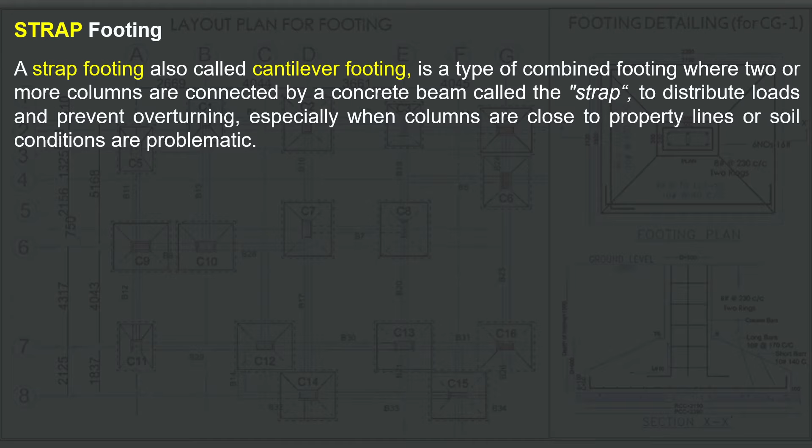So strap footing, also called the cantilever footing, is a type of combined footing where two or more columns are connected by a concrete beam called the strap, to distribute loads and prevent overturning, especially when columns are close to property lines or soil conditions are problematic.

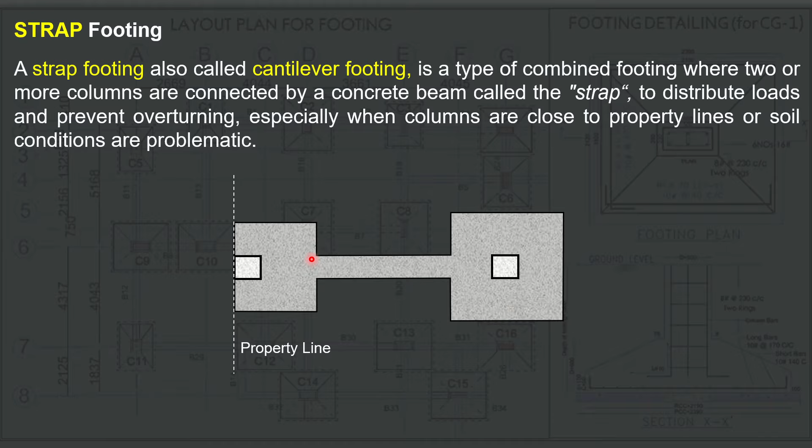So ito yung typical na setup natin para sa ating strap footing. Minention na rin dito na advantage ang paggamit ng strap footing kapag yung isang pundasyon natin ay adjacent sa property line. Kapag adjacent ito, kailangan mo siyang lagyan ng strap beam. By the way, this is what we call the strap beam. So by connecting these two foundations, magiging strap footing na yung setup natin dito sa ating mga pundasyon.

Another advantage ng ating strap footing ay kapag yung soil conditions natin ay problematic, para rin ma-prevent natin yung pag-overturn. So kailan ba nagkakaroon ng overturning? Kapag sobrang lakas ng pressure sa ilalim ng lupa natin na nagkakaroon ng uplift, then possible matumba yung ating pundasyon. So para ma-prevent yon, kailangan natin gawin itong combined footing.

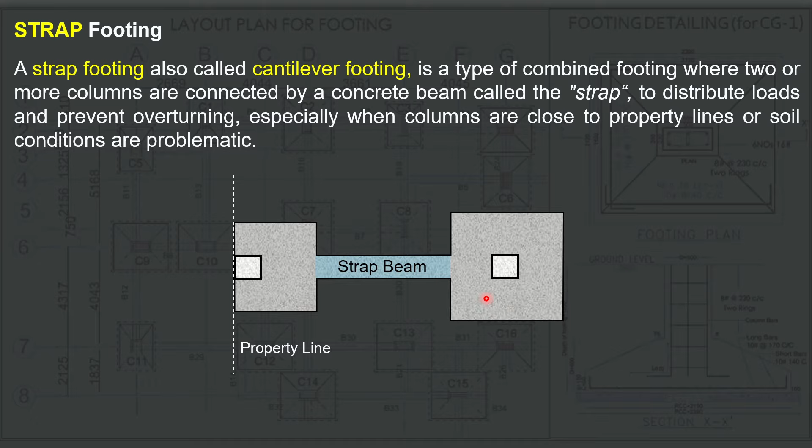Options natin yung rectangular combined footing, trapezoidal combined footing, o pwede rin naman itong simple lang na strap footing. Isa pang advantage ng strap footing ay makakatipid tayo sa volume ng concrete. Connect mo lang yung ating dalawang pundasyon para maging combined. Yun yung isa pang advantage ng strap footing natin.

Okay, next yung design considerations naman natin para sa ating strap footing. Say for example, ito yung ating plan view and elevation view ng strap footing natin. Number one consideration, the external footing is a concrete wall footing. So nasaan ba dito yung ating external footing between footing A and footing B? Yung ating external dito ay yung one touching the property line, labas na yan essentially. So ito yung ating external footing. Ang sabi dito, magbe-behave daw siyang parang concrete wall footing. Halimbawa, ito yung ating column, extend lang natin ito, magiging concrete wall footing na ito ang ating external footing.

Number 2 consideration, the contact pressure is uniform. Anong ibig sabihin nito? Yung pressure sa ilalim ng footing A ay dapat equal dun sa pressure na nangyayari sa ating footing B. Of course, this is combined footing, so essentially kung ano man yung nangyayari sa A, yun din dapat yung nangyayari sa B, dahil as one naman talaga sila dito.

Last consideration, the interior footing is isolated with a large column, commonly designed as a square footing. Madalas ang shape ng ating mga interior footing ay square footing. Yung footing A dito, pwede itong maging rectangular essentially. Tapos sabi rin dito, yung interior footing natin madalas meron siyang large column compared dito sa footing A. Kasi itong interior, sila yung may pinakamalalaking loads na binubuhat sa mga buildings. Kaya dapat sila talaga yung may pinakamalaking size ng column and also pinakamalaking size na pundasyon. Yun yung criteria natin para dito.

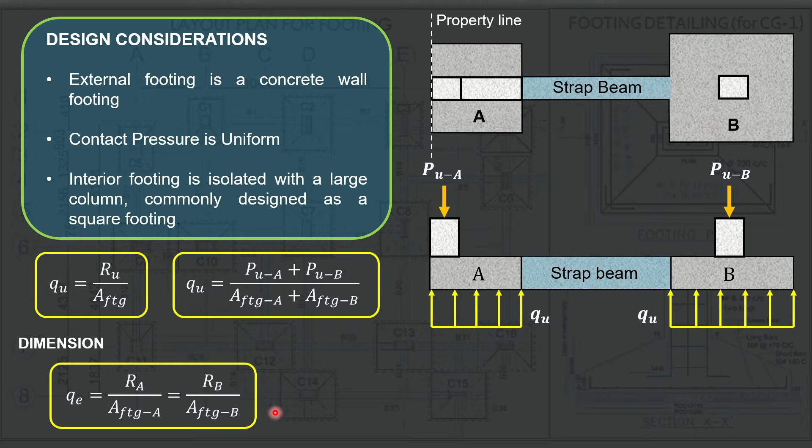Okay, and then for the dimension, ito pa rin naman yung formulas din natin. The QE is equal to RA over area of footing A, or this is equal to RB divided by area of footing B. Of course, yung mga R dito, ito na yung magiging service loads din natin dapat, kasi for dimensions, service loads dapat yung mga loads natin dito. Now, ito naman yung magiging RAU natin at saka ang RBU, hiwalay na to bale. Take note that now we have two resultants or reactions dito sa ating strap footing.

So, RAU, ibig sabihin ultimate ito, no? So, ide-derive natin ito dito. Babalikan lang natin ito. Separately natin silang gagawin, no?

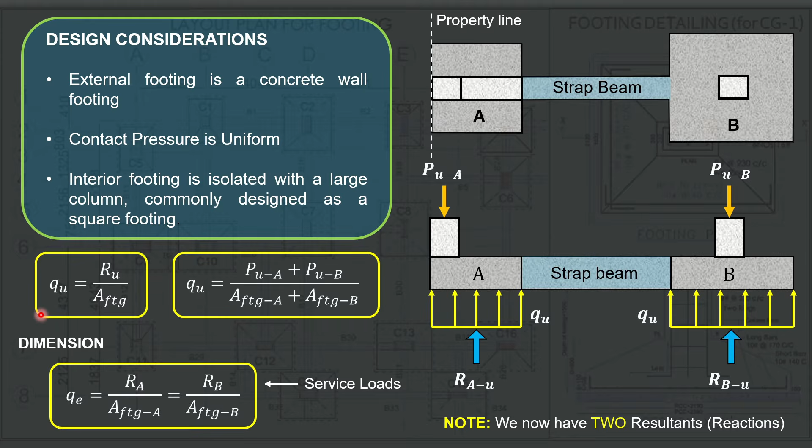So, pag solve natin yung QU nung as one, ito yung gagamitin natin na formula. And then, for solving RA and then RB, babalik tayo sa formulang ito. So, hiwalay natin sila mamaya.

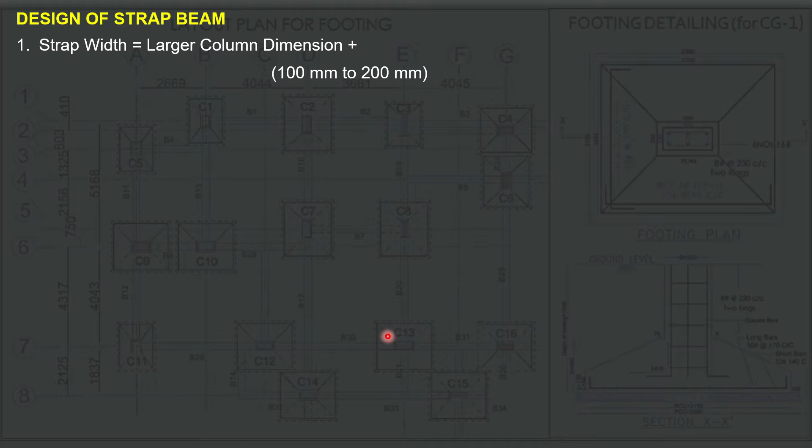Okay? So, ito naman yung sa design ng strap beam natin. So, for the strap beam, number 1, yung strap width natin is nasosolve natin by considering the larger column dimension, tapos nagdadagdag tayo ng 100 to 200 mm na additional.

Okay? Number 2, the design moment and shear is calculated from the edge of the footing pad. Ang ibig sabihin nun, kung ito yung ating strap footing, ito yung edge na sinasabi niya, no? So, yung edge ng ating strap beam. So, dito merong lalabas na VU and MU for both edges.

Take note na yung VU natin dito sa left footing ay dapat or always equal sa VU dito sa right footing. Pero yung MU is not always equal. So kung magde-design tayo ng bakal or main bar nitong ating strap beam, kunin na lang natin kung sino yung pinakamalaking MU between left and the right.

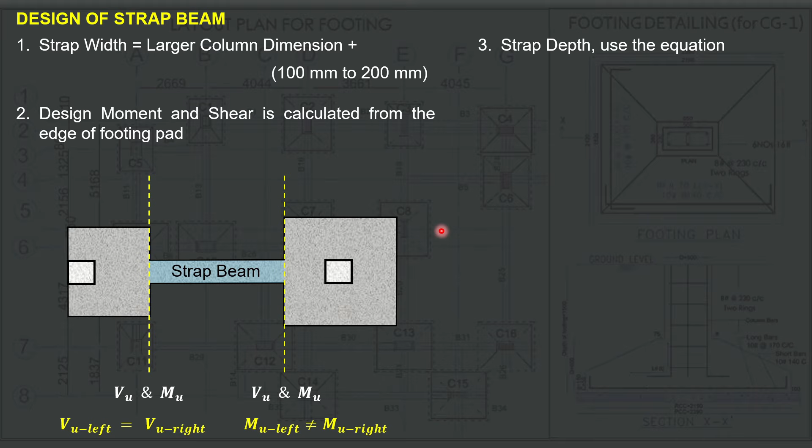Step 3, the strap depth. Use the equation VU must be less than or equal to the phi VN, where the phi VN here is simply equal to 0.75 yung phi natin, then yung VN natin, okay, yung nominal shear natin is simply 1/6 lambda square root F prime C BD. Then for the shear reinforcement, dito na siya papasok.

So kunin lang natin dito yung magiging spacing natin muna. So ang sinosolve kasi natin dito sa step na to is the D. Okay, so pagka-solve natin nung D, kunin natin siya dito. D over 2, then compare dun sa 600 mm. So kung sino man yung pinakamaliit doon, so yun yung i-adapt natin na spacing.

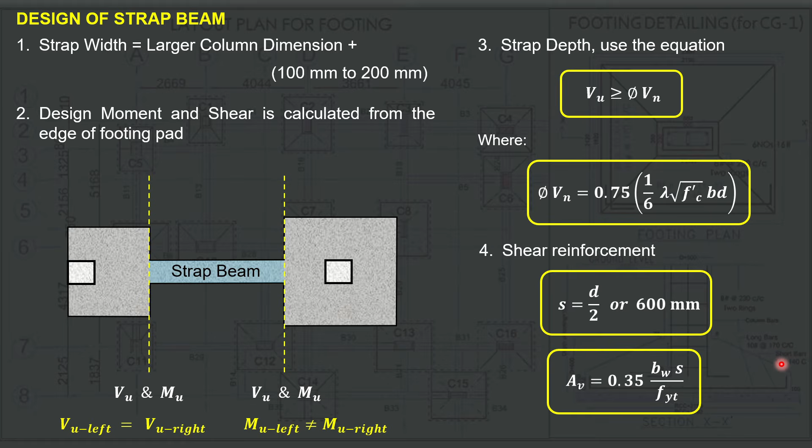Then yung spacing na makukuha natin dito is gagamitin natin sa formula ng minimum. AV is equal to 0.35 BW. This is the width of the strap beam. Yung S, yung nakuha natin dito sa step number 4. Then divide this by the FYT nung ating shear reinforcement for the strap beam. And then dito, meron ka na ditong area ng shear para dito sa ating strap beam. Okay, AV is equal to 0.35 BWS over FYT.

Alright, example number 3, strap footing. Two 0.4 by 0.4 meter columns 6 meters apart are transmitting loads on two separate footings connected together with the strap beam. The left column carries 300 kN of dead load and 250 kN of live load, while the right column carries 500 kN dead and 400 kN live. The allowable net soil pressure is 120 kPa. The reactions for both footings are spaced 5 meters apart.

Assume weightless strap beam. Use one effective depth for all calculations. F prime C is 21 megapascal and Fy is equal to 276 megapascal. The bar diameter is also 25 mm.

Okay, so meron tayo dito ang strap footing. Okay, so yung column distances natin dito, center to center is 6 meters as mentioned na rin dito sa ating problem. Okay, and then meron pa ditong isang distance na minention, yung 5 meters apart, yung reactions daw. Okay, so yung reactions natin dito, so RA and then the RB. So tawagin natin tong footing A and then footing B na lang itong interior natin. So RA and then RB.

So they are 5 meters apart. So again, no, yung center to center nung ating column, that is 6 meters. Then yung center to center nung ating reaction is 5 meters. So again, no, recall natin na yung mga reactions or resultants natin, they are always acting at the center of the footing. So yung kung ito yung footing A natin, yung RA natin nag-a-act sa center ng ating footing A, then yung RB naman nag-a-act dun sa center ng ating footing B.

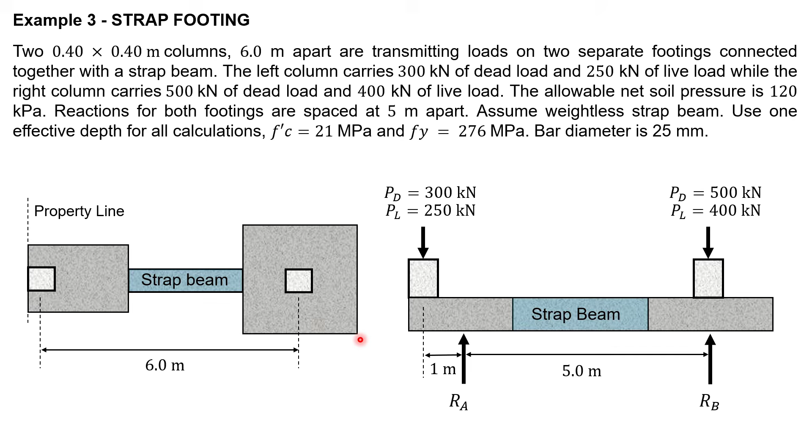Dito naman sa right column, we have 500 for the dead and then 400 for the live. So kahit hindi sabihin yung left or right column dito, dapat alam natin na ang interior natin ang dapat magbubuhat nung pinaka malalaking loads. Ano man yung summation neto, for example, this one is 550 and then this one is 900, yung 900 dapat dun natin i-load sa interior column lagi. Okay, so yun yung ating isang assumption dito.

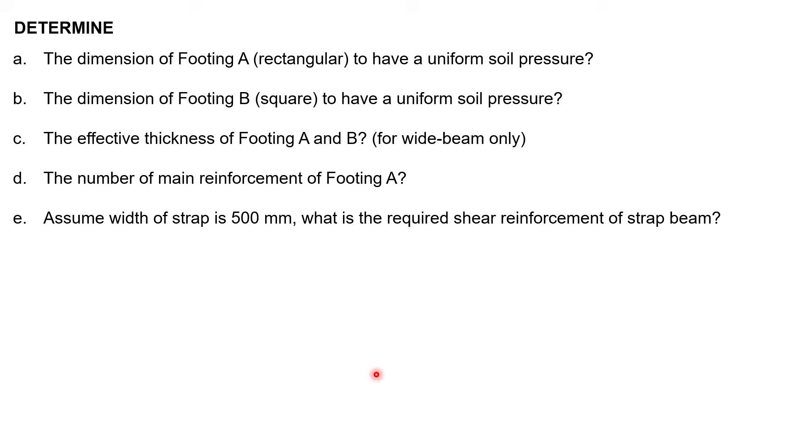Now ito yung mga tanong. Determine the dimension of the footing A, which is a rectangular daw, to have a uniform soil pressure. Dimension of the footing B, the square, to have a uniform soil pressure. Letter C, the effective thickness of footing A and B for wide beam only. Okay, and then D, the number of main reinforcement for footing A. And then E, assume width equal to 500 mm, what is the required shear reinforcement of the strap beam?

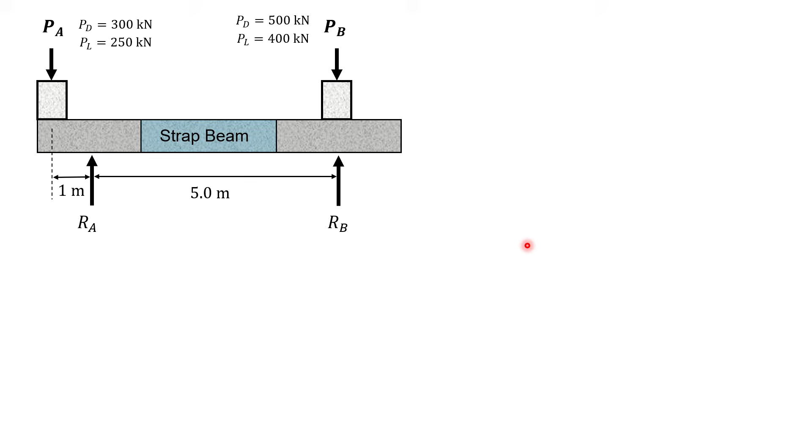Okay, so ito yung ating strap footing elevation. Okay, so nandito na yung mga dead and live natin and everything. So unahin na natin dito i-calculate muna yung mga service loads natin.

Okay, so for PA, this is simply dead plus live. So 300 plus 250 is 550. Then for PB naman, that is dead plus live din, 500 plus 400, that is 900 kilonewton.

Okay, then solve na rin natin dito yung factored loads. So for PA ultimate, that is 1.2 dead plus 1.6 live, or 1.2 ng 300 plus 1.6 ng 250 is 760 kilonewton. Then for PBU naman, that is 1.2 ng 500 plus 1.6 ng 400, then we have 1,240 kilonewton.

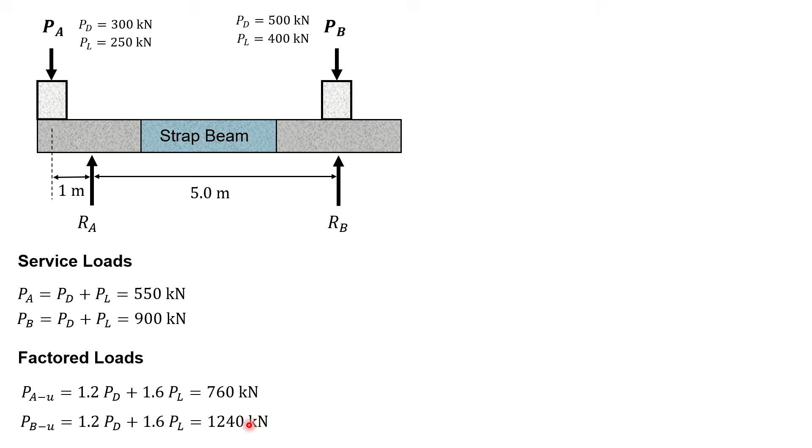Okay, so ito yung isa sa mga unang steps natin dapat, no? Separate na natin yung service and then the factored loads para diretso inputs na lang tayo.

Okay, so for A, tanong dito is yung dimension daw nung ating footing A. Okay, so for example, this one is the footing A natin. Okay, then nandito yung ating PA dito, which is equal to 550 kilonewton. Okay, so magkakaroon dito ng reaction A daw na nag-a-act dito sa center ng ating pundasyon.

Okay, so for example, this is the length of the ating foundation A. Recall natin, resultant acts at the centroid of the foundation. So kung X distance yung nandito, dapat X distance din yung nasa right. So paano natin kunin dito yung length ng ating pundasyon?

So actually, recall natin na yung kanina dito, yung centroid nung column A papunta dun sa reaction, meron pa tayong sobra na 1 meter. So ito yan kanina, no? Tapos ang ating distance na to, okay, so it is actually at the center of our column.

Now yung column natin dito sa column A, o actually both of the columns natin ay 0.4 by 0.4. So yung half nung 0.4 natin, that is actually 0.2. So dito pa lang pwede na natin kunin actually yung X natin dito. So yung X is simply 0.2 plus 1, so we have 1.2 meters.

Then we can actually see, no, that L is simply 2X. So yung L natin dito ay na-solve na natin kaagad, no, just by looking, 2.4 meters. Okay, and then take note, no, para makumpleto natin yung dimension ng ating rectangular footing A, the net pressure here is 120 kilopascal as mentioned dun sa problem natin. Then ito lang yung gagamitin natin.

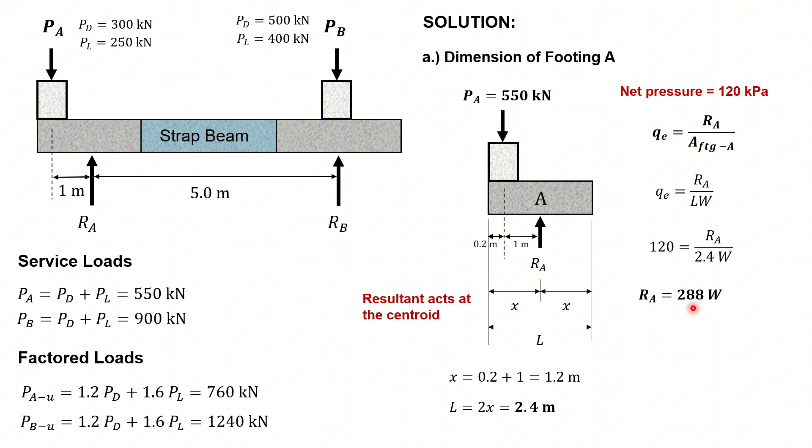Q effective is simply equal to the RA, the reaction A, divided by the area of the footing. Then pwede natin itong simplify, yung area ng footing is simply length times the width. Okay, then yung QE natin, yun pa rin naman. So substitute natin dito, QE is 120 kilopascal is equal to RA, di natin alam, divided by 2.4 yung length times yung width na hindi rin natin alam pa. Okay, so pwede nating sabihin that RA is equal to 120 times 2.4, that is 288 times yung W. Then, say for example, tawagin natin tong equation number 1.

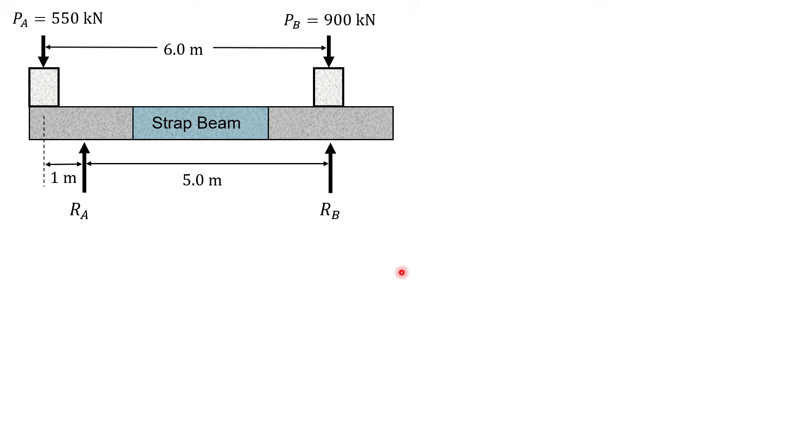Okay, so again, no, yung distance daw ng ating column to column ay 6 meters. Okay, so nandito yung PA natin 550, then yung PB natin na 900. So service lang muna yung tinitignan natin dito kasi dimension yung kailangan natin. Okay, so para makuha natin, no, yung magiging value ng RA, para makuha natin yung W, simply we take moment from the center of the column B. So papasok yung PB, so 0 na yan, wala siyang moment arm.

Then papasok din yung RB natin, wala rin siyang moment arm. So sino yung mga papasok lang dito? Okay, so by equation, this is summation of moment sa B equal to 0. RA times 5, that is clockwise, kaya positive. Then minus 550 times 6, which is negative kasi counterclockwise, is equal to 0. So pwede na nating sabihin that RA is equal to 660 kilonewton.

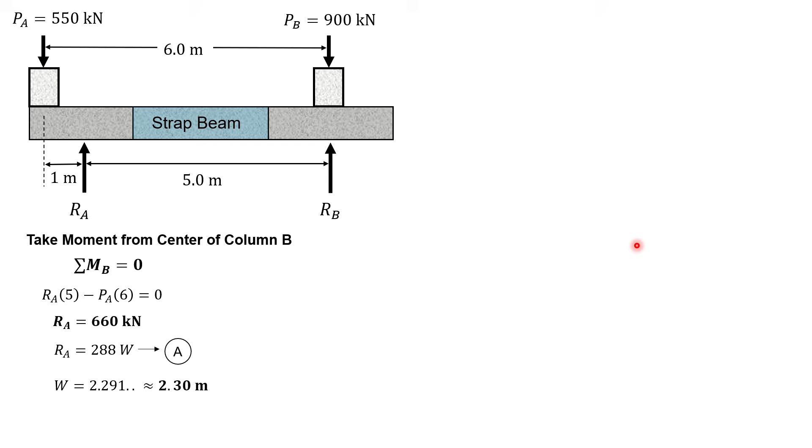Then babalikan natin yung ating equation A. So RA is equal to 288 W. Then pwede natin sabihin na yung W ay 2.291 something or 2.3 meters. Meron na tayong dimension for the A, that is simply L by width, yung length natin ay 2.4, then yung width natin na 2.3. Then this will be our answer for footing A.

Okay, and then next sunod natin dito, we take the forces vertical. Meron na tayong RA, PA, at PB. Kunin na rin natin dito ano ba yung value ng RB. Summation of forces vertical equal to 0. Yung RA and RB natin pataas parehas, so positive. Yung PB and PA natin dito ay pababa, so negative. Substitute everything: 660 plus RB minus 550 minus 900. So meron tayo ditong RB na equal to 790 kilonewton.

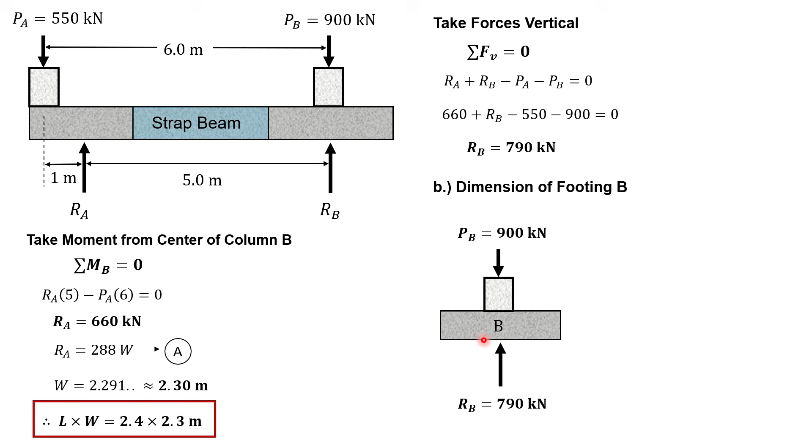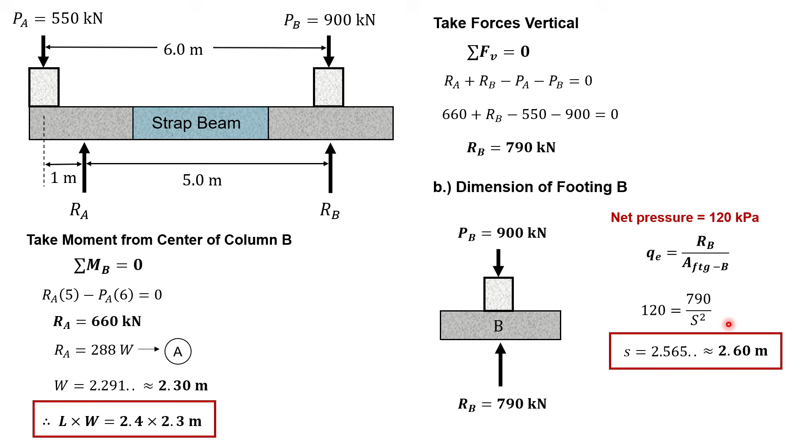Pwede na nating isolve din yung ating dimension for the footing B. Merong PB dito, at meron tayong RB, concentric yung PB natin and the RB. Recall natin ulit that the net pressure is equal to 120 kilopascal. Gamitin din natin yung formula na QE equal to RB divided by the area of the footing B. Pwede nating sabihin that QE is 120, yung RB natin na-solve na natin 790, then divide this by S square. Bakit S square? Kasi square yung ating footing B. Okay, so finally meron tayo ditong S na equal to 2.565 something or 2.6 meters. So ito na yung ating dimension for the footing B.

Then next, solve na natin agad yung ating QU. So ito yung ating strap ulit. This time naman, dahil QU na yung sinosolve natin, input natin dito yung mga ultimate na PA at PB, hindi na yung PA na service at PB na service ang ilalagay natin. QU na yung sinosolve natin, so dapat ultimate na rin yung mga actual loads natin. Nasolve na rin naman natin yan kanina.

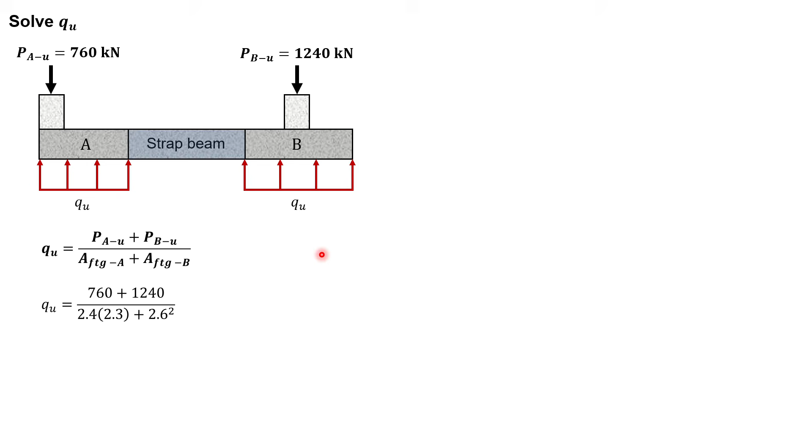Now, to solve the QU, ito yung formula na gagamitin natin: ultimate nung A plus ultimate nung B, divided by area of the footing A plus area of the footing B. Yung ultimate natin for A, that is 760, at para sa B naman, 1240. Yung area ng ating footing A is simply 2.4 by 2.3, yan yung rectangular, at 2.6 square naman para dun sa ating footing B. Finally, pwede na nating sabihin that QU is simply 162.87.

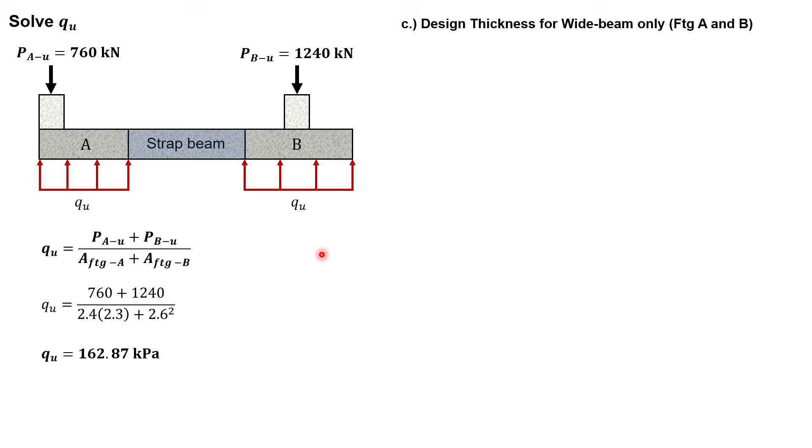Kilopascal. Okay, so for the letter C, design thickness of the wide beam for footing A and footing B. So wide beam lang yung mention dito, no? I-check lang natin yung wide beam nung dalawa, at kung ano man yung mag-govern na thickness, yun na yun. Again, take note that the external footing is a concrete wall footing. So ito yung ating design consideration number 1 kanina, no? Ito yung magiging analysis natin dito for the wide beam.

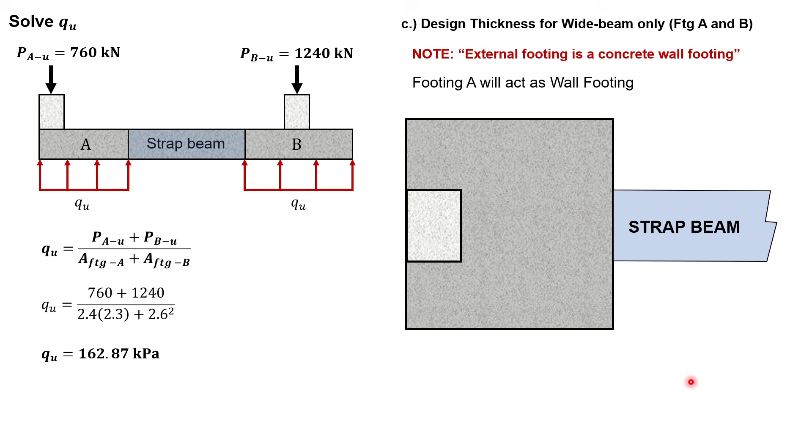Now, footing A will act as a wall footing. Anong ibig sabihin nun? Ito yung ating footing A kanina, kinat na natin dito yung strap beam natin. Now again, the footing A will act as a wall footing, so extend lang natin yan dito. Ito, yung column natin, magiging wall na siya.

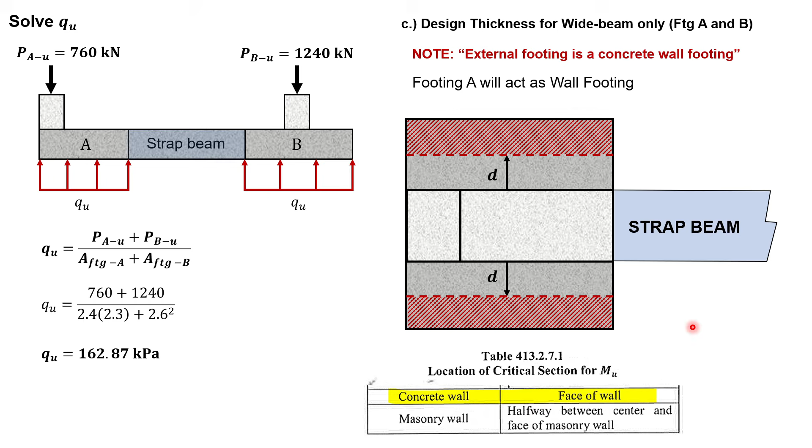Now dahil wall na yan, balikan natin yung ating table 413.2.7.1 that for a concrete wall, yung ating location ng MU is at the face of the wall. Dito na natin susukatin yung mga effective depth natin, yung D distance para makalculate natin yung wide beam. Okay, so for punching, D over 2; for wide beam naman, D distance. So for example, D distance dito, and then nandito na yung ating mga wide beam. Dito masisira, no? Ito yung critical for wide beam dito sa ating footing A.

Now, for the wide beam for footing A, say for example, ito yung ating plan view na kanina. Yung length natin, that is 2.4.

Ang width natin ay 2.3, then yung column natin ay 0.4, at yung wall natin i-assume natin na 0.4 na rin. So again, ang distance mula sa face of the wall, dun mangyayari yung critical section for wide beam. Kahit isa na lang dito yung tignan natin.

Ito na lang yung consider natin kasi parehas lang naman yan dun sa itaas. Paano natin malalaman yung area ng critical section natin? Meron na tayo ditong 2.4 na gusto nating malaman, ano ba yung distance dito. Meron tayo ditong 2.3, ibawas lang natin yung 0.4, so meron tayong 1.9. Yung 1.9 na yun, paghahatian nitong dito and dito sa taas.

That is equal to 1.9 divided by 2, equal to 0.95. So yung distance na to ay equal to 0.95, parehas na yan dito. Pwede na natin kunin kung ano man yung excess dito. Ito ay the distance, alam natin na this must be equal to 0.95 minus yung D.

Yung ating critical area for wide beam is simply 2.4 by 0.95 minus the D. Ito yung ating QU dito, ito yung ating footing, and ito yung kanyang wall kanina. Kung mapapansin natin, in-extend na natin siya hanggang dito dahil magbe-behave naman siya na parang wall.

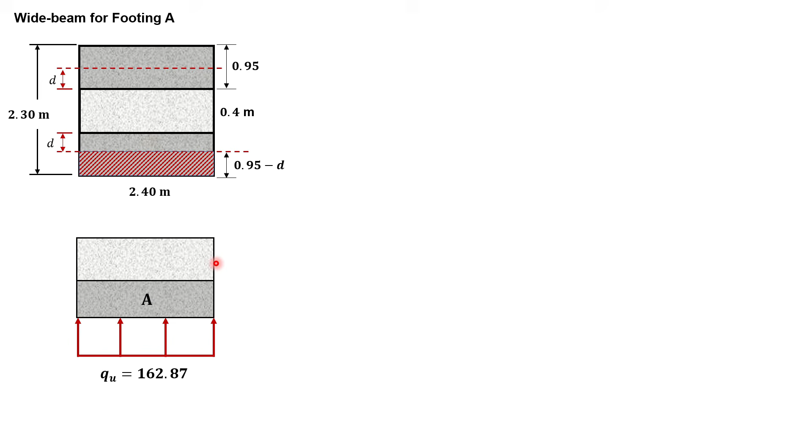Para makuha yung ating effective depth dito, kasi unknown siya, equate lang natin yung capacity dun sa required. Ang ibig sabihin lang nito, dapat yung allowable VU natin must be equal to the actual VU. Kapag sinabing allowable, gamit yung kanyang section lang, at yung actual naman ay gamit yung mga load na nangyayari dito sa ilalim ng ating pundasyon.

So for the VU allowable, this is simply equal to the phi VC. 0.75 yung phi natin, yung VC natin ay 1/6 lambda square root F prime C BD. Then equate this to the VU actual. Yung VU actual is using the loads, so that is simply the QU times the area shaded.

Now, substitute natin lahat dito. 0.75 times 1/6, yung lambda natin walang binigay, so assume natin na 1, square root of 21 times 2.4 by D. Yung B natin, yung width natin ay yung 2.4, times yung D natin ay yung effective depth natin dito. Ito yung area, hindi natin nakikita dito. Kung naputol ito dito, yung cross-section natin ay BD.

2.4 by D, tapos we multiply here 1,000 kasi may ginawa na tayong meters dati. Mag-multiply lang tayo dito ng 1,000 para maging meters mamaya yung masosolve natin na D. Then equate this to QU area shaded. Yung QU natin ay 162.87 times yung area shaded natin ay 2.4 by 0.95 minus the D.

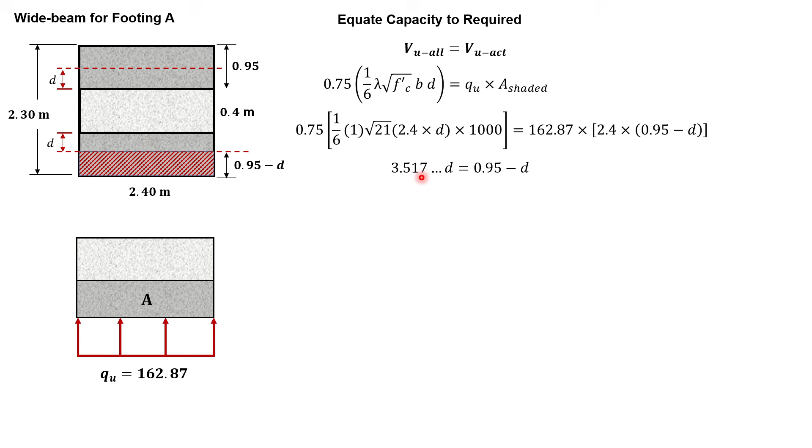Pwede na natin tong i-simplify or pwede na natin ditong masolve yung ating D. Siguro simplify lang natin muna. Lahat ng mga constant nilagay ko dito sa may bandang left equation. Yung naiwan ay 3.517 something times the D is equal to 0.95 minus the D. Finally, pwede na natin dito makuha yung value ng D, 0.2103 meters. Hindi pa to yung sagot, again we're looking at the footing A pa lang dito.

Next, for the footing B naman, this is a square footing. 0.4 pa rin naman yung ating columns, then ito naman yung kanyang elevation view. Dahil square naman ito, kahit saan na tayo magsukat ng D distance for the wide beam. For this example, kunyari dito na lang natin siya sukatin sa may bandang itaas. Ito na yung critical for the wide beam para dito sa ating footing B.

Ito yung distance natin na 1.1 minus D. Paano naman nakuha itong 1.1 na yan? Meron tayo ditong 2.6, then i-less lang natin yung 0.4 muna, so that is 2.2. So 2.2 dito sa taas.

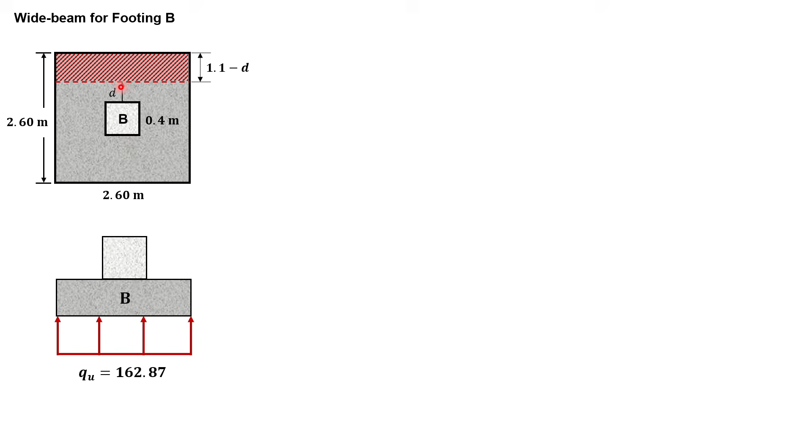Dito sa taas and baba, so 2.2 yung naiwan. Paghahatian nyo nung taas and then yung baba, so 2.2 divided by 2 is simply the 1.1. Yung distance na to ay 1.1 na. Kung gusto lang natin malaman yung part na to, 1.1, i-minus lang natin yung D dito. Kaya yun yung kanyang magnitude dito.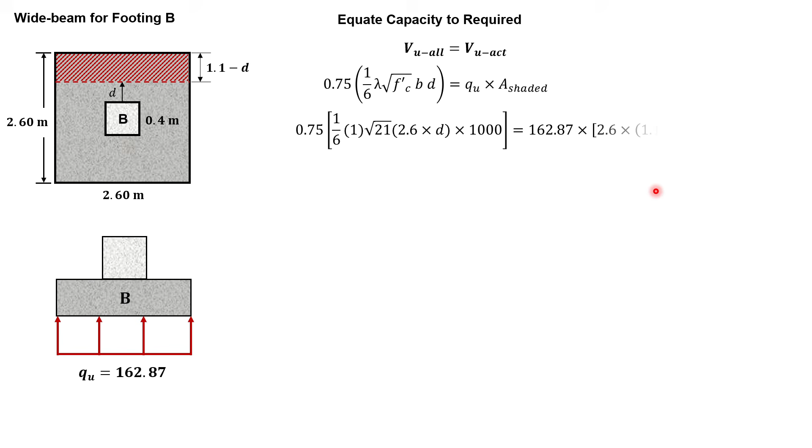And then, ganun pa rin naman yung gagawin natin. Equate the capacity to the required. VU allowable is equal to the actual. Okay? And then, for the allowable, ito pa rin naman yung area natin. Then, yung formula natin. Then, VU actual, ganito pa rin naman. Area shaded times QU. And then, try natin tong i-simplify pa, no?

So, dito sa left side, halos same siya kanina dun sa footing A. That is 3.517 something times D is equal to yung naiwan dito sa right equation natin na 1.1 minus the D. Okay, so ito lang pinagkaiba nila. And finally, meron na tayo ditong D na equal to

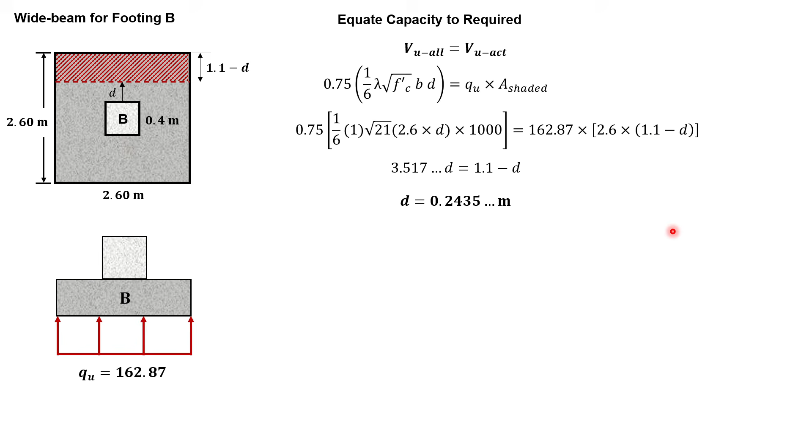0.2435 meters. So, comparing this D dun sa kanina, which is 0.21 something, okay, so ito yung mag-govern na effective depth. Okay, so yung mas makapal na effective depth, siya yung mag-govern.

Now, using this one, since the effective depth of the B governs, calculate natin yung magiging design thickness natin para dito sa ating pundasyon ng A and the B. Okay, so kung ano man yung gagamitin natin na thickness dito, all throughout, parehas na siya dun sa A and B. Now, to calculate the thickness of the foundation, so for example, no, ito yung ating wide beam.

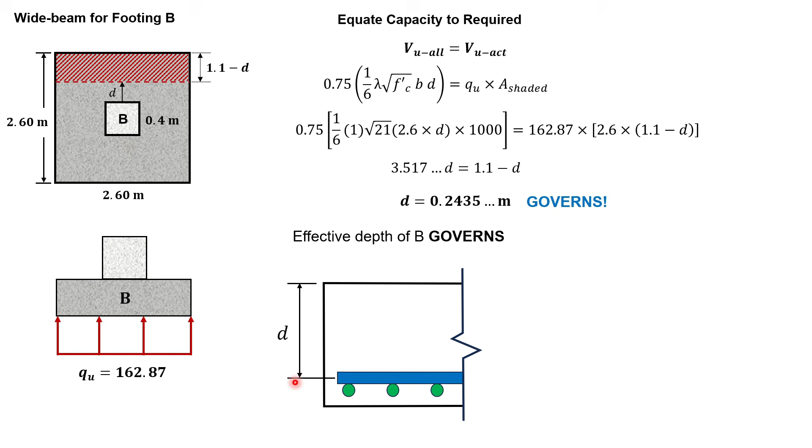Okay, so yung effective depth ng wide beam natin ay susukatin natin sa centroid ng ating top bar. Actually, regardless kung punching man yung mag-govern, ganito pa rin natin siya susukatin. Always dito sa centroid ng top bar. Okay, take note, no, for the design of the thickness, ito yung lagi natin gagamitin. Always natin gagamitin na formula is equal to effective depth plus 1.5 diameter plus the concrete cover.

Now, ano bang ibig sabihin nito? Kung nilagay kasi natin yung effective depth dito sa ating centroid ng ating top bar, magproproduce ito ng mas makapal na pundasyon, no? Na thickness ng ating pundasyon. Okay? So for example, yung nag-govern kasi is for punching, for example. Now, yung effective depth ng punching by definition ng NSCP is measured dito sa gitna ng top and then the bottom. So kung nandito yan sa gitna, yung magiging design thickness natin is simply equal to effective depth plus 1 diameter plus concrete cover. Okay?

So obviously, kung 1 diameter yung multiplier natin dito, mas maliit na yung ibibigay niya sa atin na design thickness. Okay? Kaya regardless man, no, kung punching man yung nag-govern or wide beam or whatsoever, ito lagi yung magiging formula natin for the thickness. D plus 1.5 diameter plus the concrete cover.

Now, let's substitute everything here. The effective depth na nag-govern ay 243.5. So this is now in millimeter plus 1.5 diameter of the rebar is 25 mm plus yung minimum na concrete cover natin for foundation is 75 mm. Meron tayo ditong 356 mm na thickness.

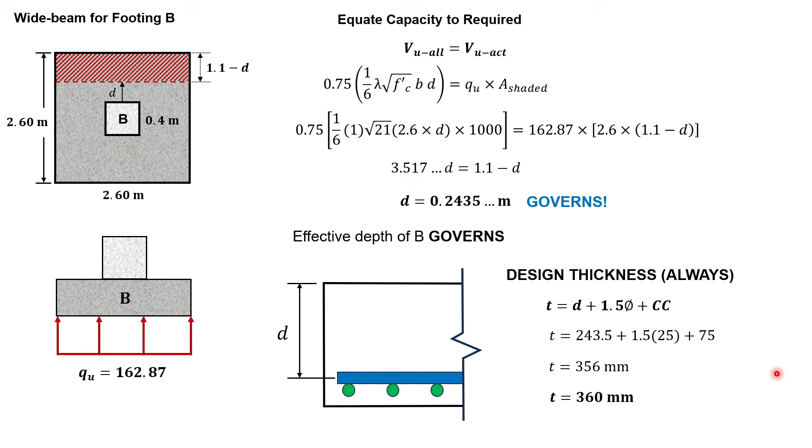Then of course, ayaw naman natin na ganito yung magiging itsura ng ating design thickness. So pwede natin tong sabihin na thickness is equal to 360 mm.

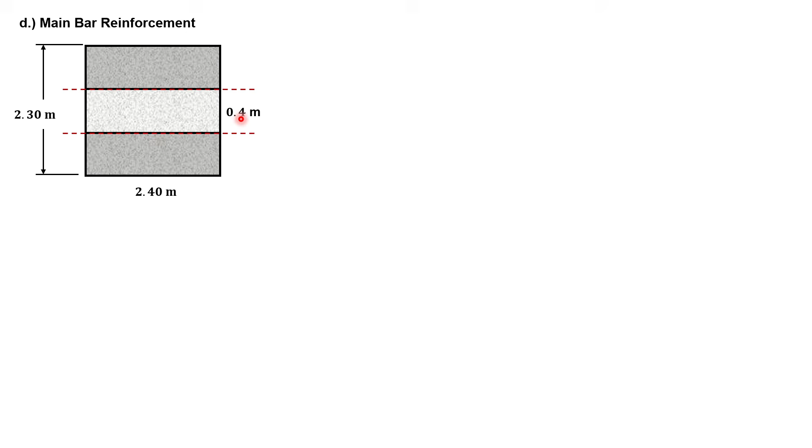Okay, so for the footing A. So ito yung ating dimension for the footing A, 2.3 by 2.4. Then 0.4 yung ating wall dito. Okay, so again, yung column natin naging wall na dito. Okay, so ito yung magiging location ng ating critical for MU. Okay, so dito siya mapuputol bale, no, because of the bending. Now, this is the section or the area for the critical MU natin.

Now, tawagin natin ito na N, which is equal to 0.95. Again, paano nakuha yung N equal to 0.95? That is 2.3 minus 0.4 gives us 1.9 and then hati dito sa taas and then baba. So meron tayo ditong N na equal to 0.95.

Now dito, ito yung mapuputol na area para sa bending. Okay, then for example, ito yung itsura na yan. So gawin lang natin yung kanyang 3D dito. We have here 0.95 and then 2.4, ito yung kanyang length.

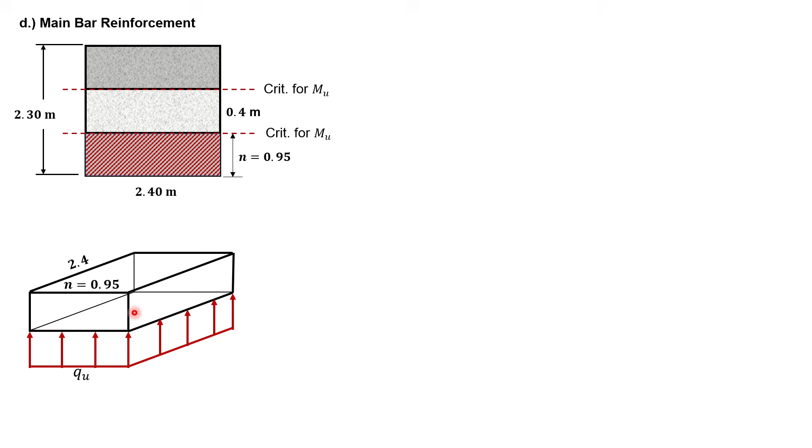Tapos of course sa ilalim ng naputol na to, okay, meron tayo ditong QU. Because of this QU, okay, so meron tayong resultant for the QU here which is equal to the FU na lang. Tawagin nating FU and then because of this FU, magkakaroon to ng moment. Magkakaroon ng resistance dito ng moment. Para makuha natin yung MU, kailangan muna natin ng magnitude ni FU.

For the formula of FU, this is simply equal to the QU times the area shaded. So ano yung area na yon? That is the 2.4 by the N. So again, yung QU natin dito ay 162.87 times yung area natin, yung shaded dito, 2.4 by 0.95.

Meron tayo ditong FU na 371.34 kilonewton. This will act at the center of the area shaded. So, half netong N, then half netong 2.4. Then, para makuha natin yung ating MU, this is simply equal to the FU times N over 2. Half netong N na nakikita natin.

Okay, so dun siya magmo-moment dito sa naputol dito, critical for MU. Now, substitute natin dito, 371.34 times 0.95 divided by 2 gives us 176.39 kilonewton meter. Meron na tayong MU dito na design moment natin.

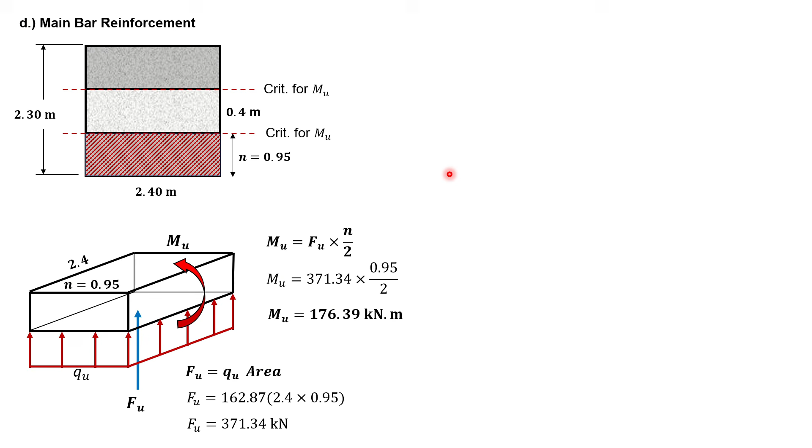So, pwede na natin kunin yung area ng reinforcement, then finally, yung kanyang number of rebars. Now, the formula for MU is simply equal to phi mn. Then, mn naman ay equal to 0.85 F prime C AB times quantity D minus A over 2.

Alright, then next, calculate the effective depth for the moment. Dito naman, iba na yung calculation natin. Kasi may nakuha na tayong thickness kanina. Then, gagamitin naman natin yung value ng thickness na yun to calculate the new D or effective depth for the moment, specifically for the moment.

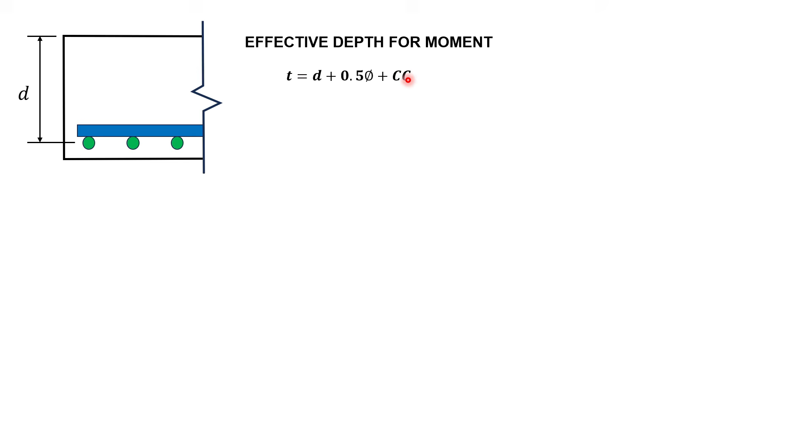So, dito ang nakikita natin na formula is, yung thickness natin dito ay magiging effective depth, measured from the top to the center of the bottom bar. So ganun yung effective depth natin para sa moment. Then, plus half of the diameter, then plus yung concrete cover. So ito yung magiging formula natin pag sa effective depth for the moment.

Now, substitute lang natin yung mga nakuha natin kanina. 360 is equal to the effective depth na bago plus 0.5 ng 25 plus 75. Then, meron tayo ditong effective depth for the moment na 272.5 mm.

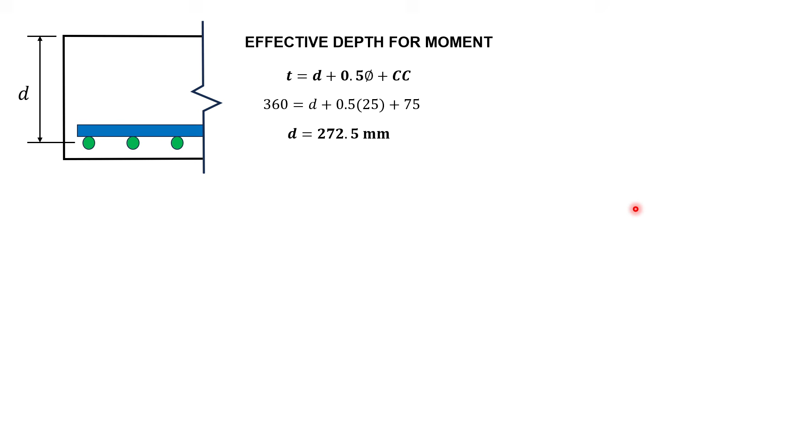Okay, then substitute lang natin lahat dito. Yung mn natin dito ay mu over phi, or 176.39 times 10 raised to 6 divided by 0.9. Again, yung phi natin dito ay always 0.9. Then this is equal to 0.85 f prime c natin na 21 times yung a unknown times yung b natin dito ay 2,400. So ito yung area nung naputol dito.

So yung width niya ay of course yung 2.4 pero in mm dapat, times yung d na nakuha natin kanina, yung bago for mu, that is 272.5 minus a over 2. Meron tayo ditong a na equal to 17.34 mm.

Then, equate lang natin yung compression sa tension. Meron tayo ditong compression na 0.85, F prime C natin 21, AB. A natin dito ay 17.34 times 2,400 is equal to, yung tension naman natin dito ay ASFY. Yung FY natin ay 276. So, meron tayo ditong AS na equal to 2,691.47 mm square.

Pero hindi pa to yung sagot. We need to check first yung minimum area natin for the reinforcement. Yung ating formula for the minimum area is equal to 1.4 over FY times the BD. So, yung ating AS min dito ay 1.4 over 276 times 2,400 times 272.5 na effective depth.

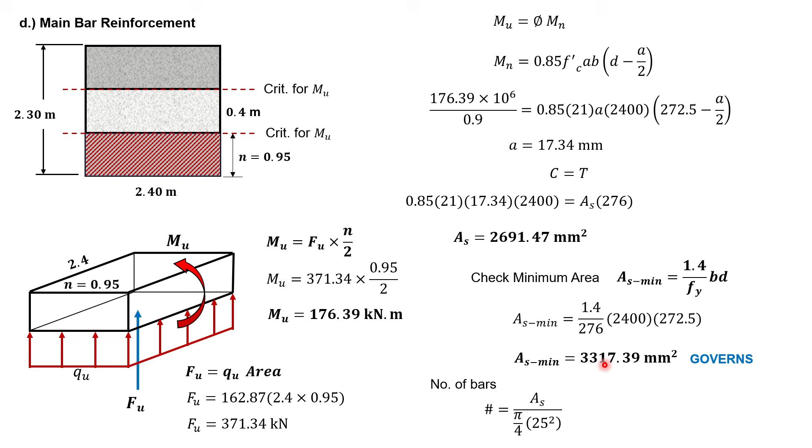Okay, so the number of bars now is equal to AS divided by pi over 4 25 square. Now again, yung AS dito ay of course yung nag-govern na area. So that is 3317.39. Then meron tayo ditong 6.76 pieces, or pwede nating sabihin that this is actually equal to 7 pieces. Now this will be our answer for letter D.

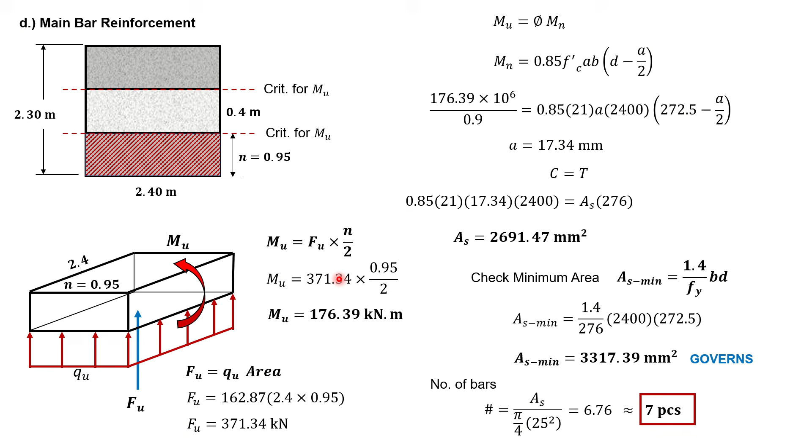Alright, and then the last one, the strap beam shear reinforcement. Yung width ng ating strap dito ay binigay na rin na 500 mm. Then this one is the elevation view of the strap footing ulit. So nandito yung ating ultimate na PA, then PB, then meron din tayo ditong RAU and then the RBU. So for the critical, this is the critical location of the MU and VU for the strap beam.

Now recall natin yung ating formula, that the QU is equal to the RU divided by the area of the footing. So, separate natin kunin yung value ni RAU and then the RBU using this equation. Pwede nating sabihin that RA or the RAU is actually equal to QU times the area of the footing A. Then, for the RBU naman is simply QU times the area of the footing B. So, ganito lang yan, yung RAU natin ay QU times area of the footing.

162.87 times yung area ng footing natin for footing A, that is 2.4 by 2.3. So meron tayo ditong RAU na 899.04 kilonewton. Then for the RBU naman, QU, 162.87 times yung area niya ay 2.6 square. So meron tayo ditong RBU na 1,101 kilonewton.

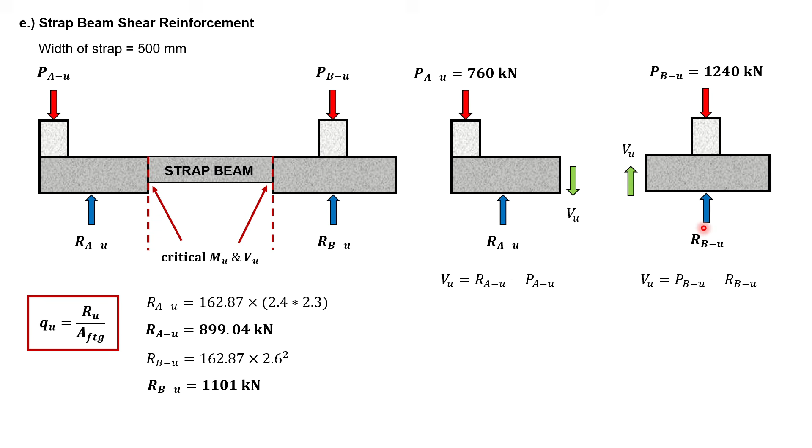Okay, then ito na yung separate, isolated, footing A, then isolated na footing B natin. So dahil kinat na natin siya dito, meron lalabas dito ng mga VU natin. Say, for example, pababa dito sa left, then pataas naman dito sa ating right. Now, yung formula ng VU natin dito sa left, that is simply equal to positive yung opposite sa VU. So yung opposite dito sa VU dito sa left ay yung RAU. So siya yung positive, then minus yung PAU dito. Then sa kabila naman, yung positive dito ay yung opposite, which is yung PBU naman, minus RBU. Okay, so ganun lang yung simple equation natin.

Now, substitute natin everything. RAU natin ay 899.04 minus yung PAU natin na 760. Then yung PBU naman natin dito ay 1240 minus 1101. So finally, meron tayo ditong VU na 139.04 kN para sa left. Then meron din tayo ditong 139.0 kN dito sa right. So ito yung sinasabi natin na yung VU natin for the left is always equal to the VU to the right. So 0.04 kN is almost negligible, no?

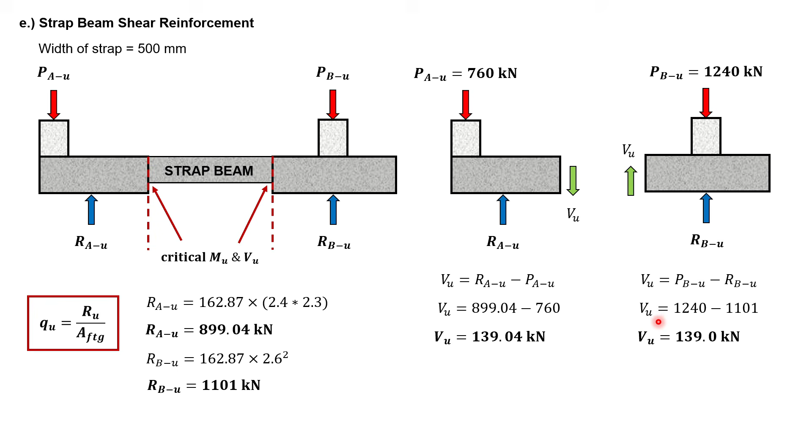Okay, then finally meron na tayo ditong equation. VU equal to the phi VN. Again, yung VU natin, na-solve na natin, 139. Tapos equate lang natin sa phi VN natin. So expand natin dito yung phi VN muna. Again, yung phi natin dito ay 0.75. Then yung VN dito ay yung VC lang ito essentially. So that is 1 over 6 lambda square root F prime C times the BD.

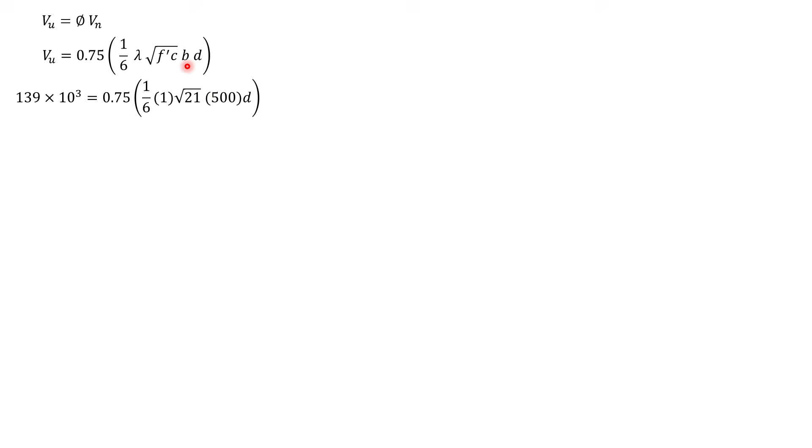Okay, then substitute natin yung VU natin dito. Say, for example, yung 139 yung inadapt natin. Hindi yung 139.04, no? So yung whole number na lang, 139 times 10 raised to 3 natin to equal to 0.75 times quantity 1 over 6, lambda is 1, square root of 21 times yung strap width natin na binigay na rin 500, then the effective depth. So yung effective depth natin para sa ating strap beam is simply equal to 485.32 mm.

Okay? Or pwede nating sabihin ito na 490 mm na lang para mas masimplify natin. Okay, and then kunin natin yung ating S, yung spacing natin by using the formula D over 2 or 600 mm, whichever is the lesser. So 490 divided by 2 or 600 mm, that is 245 or 600 mm. So of course, yung spacing na kukunin natin dito ay yung pinakamaliit, 245 mm.

Then finally, pwede na natin kunin yung area ng ating shear reinforcement. That is 0.35 BWS over FYT. So substitute natin everything, 0.35 times yung width natin dito ay 500 times yung spacing na nag-govern ay 245, divide this by 276. Then finally, meron tayo ditong area ng shear reinforcement na 155.34 mm square. So this one is actually the answer.

Now, if ever man, follow-up question, what if 10 mm yung ating shear reinforcement na ginamit? Then determine naman natin kung ilang legs ng stirrups yung gagamitin. So meron kasi tayong 2 legs, meron tayong 3 legs, 4 legs, no? Depende. So dito, for example, 155.34, ilang legs kaya ito? For example, 10 mm yung ginamit dito na bakal. Now, of course, yung ating area nung shear is equal to the number of the legs times area nung cross-section nung ating bakal. So, yung AB dito is the cross-sectional, then the number of legs yung N.